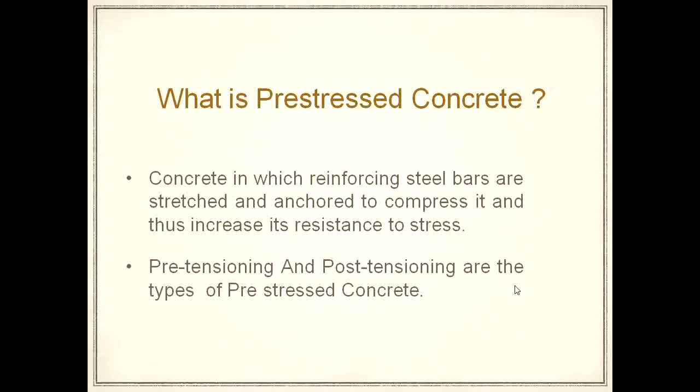So whenever we apply the load in a vertically downward direction, if it is a simply supported beam, it is going to bend like this. So when it bends, the topmost fibers are in compression and the bottommost fibers, fibers meaning concrete, the bottommost layer of concrete, are in tension.

So due to the compression and tension action, concrete can bear the compression but it won't be able to bear the tension. So on the top face there will not be any cracks in case of a simply supported beam, but in the bottom layer or bottommost fiber there will be some cracks like this.

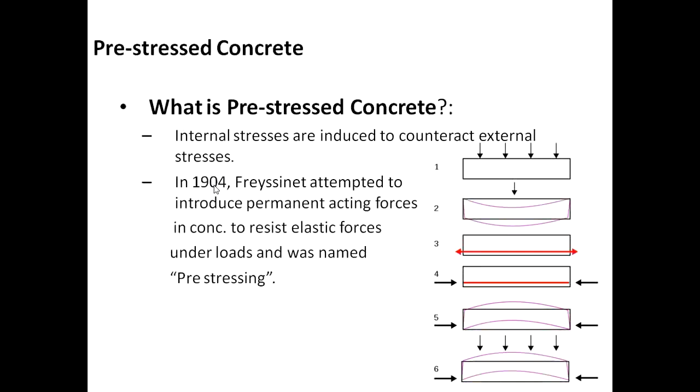So what is pre-stress? Internal stresses are induced to counteract external stresses. So in 1904, Freyssinet attempted to introduce permanent acting forces in concrete to resist the elastic forces under load, and it was named as pre-stressing. So in 1904, the arrival of pre-stressed force took place.

So you can see over here what is the main drawback of RCC, or reinforced concrete. We are going to study the main drawback of reinforced concrete first. Concrete is strong in compression, weak in tension. Steel is strong in tension, weak in compression. So reinforced concrete uses concrete to resist the compression and to hold bars in position, and uses steel to resist the tension. So in reinforced concrete, we use concrete to resist the compression and to hold the steel bars in position, and the steel is used to resist the tension.

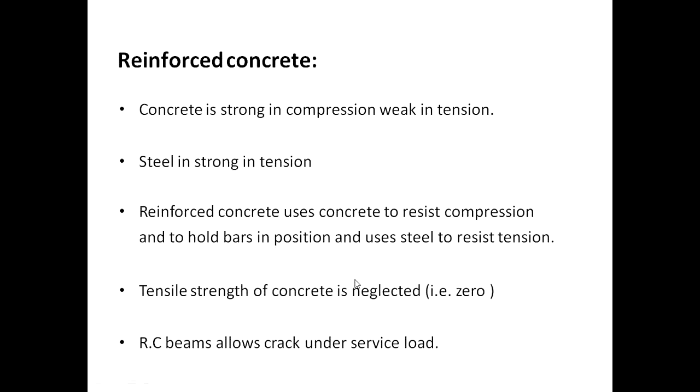So the tensile strength of concrete is neglected. Entirely, the tensile strength of concrete is neglected. So an RC beam allows cracks under service load. So that's what I have said. RC beams are allowed cracks under service load.

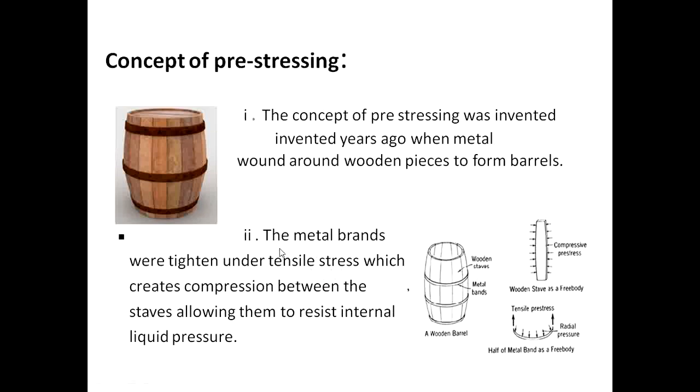Now, what is the principle of pre-stressing? Pre-stressing is a method in which compression force is applied to a reinforced concrete section. So how are we going to apply the compression force? We are going to apply the compression force by inducing tensile stresses. So the same wooden plank example I can take. Here compression forces are introduced by tightening the metal strips and inducing tensile stresses in them. Okay, so it is then possible to treat the concrete as elastic.

The effect of pre-stressing is to reduce the tensile stresses in the section to the point where tensile stresses are below the cracking stress. So actually the cracking is going to occur due to tensile stresses. As I have said, on the bottommost fiber there will be tensile stresses. Those tensile stresses are so high that they are more than the cracking stresses.

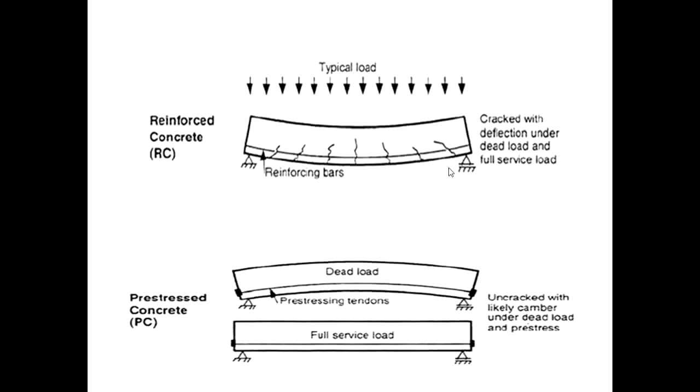So the basic principle of pre-stressing is the tensile stresses are reduced in such a manner that they should be below the cracking stresses. Thus concrete does not crack. This is the main advantage. It is then possible to treat the concrete as an elastic material. As the concrete is not cracking, it is suggested to treat the concrete as an elastic material.

The concrete can be visualized to have two compressive forces: internal pre-stressing forces, and second, external forces, dead load and live load. These two forces must counteract each other. So pre-stressed concrete is visualized to have two compressive forces. First, the internal pre-stressing force, which we are going to induce, and the external force. Simply I can say that the internal force should counteract the external force. So what is the internal force? The internal force is the pre-stressing force which we are going to induce.

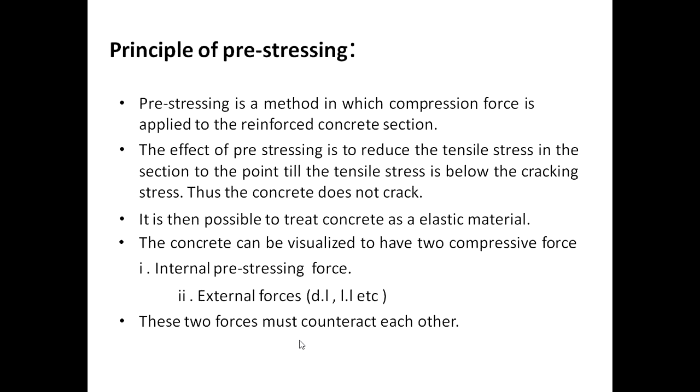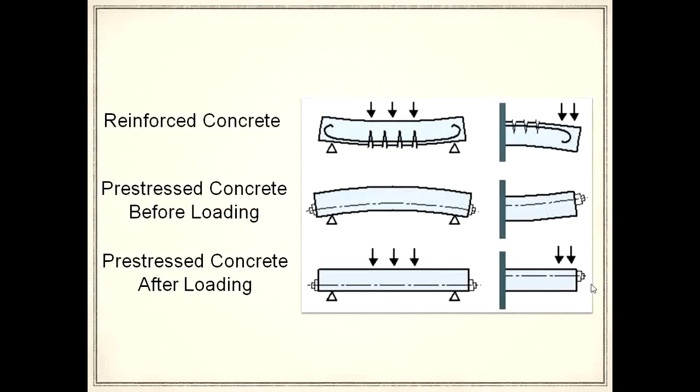Next you can see the principle of pre-stressing. We are going to go in depth later. So I will just continue with the introduction a little bit further. Okay, previously we were studying about this. So I hope you have understood the introduction clearly. Further you can see there are two types in pre-stressed concrete. In pre-stressed concrete, or in pre-stressing, there are two types.

One is pre-tensioning, another one is post-tensioning. So in pre-stressing there are two types, pre-tensioning and post-tensioning. These two differ in method of stressing. So in pre-stressed concrete we need to stress the steels. So steels are called as tendons. So we need to induce some stresses in the tendons. This inducing of the stresses is a very important parameter in pre-stressed concrete.

So in inducing the stresses there are two types, that is pre-tension and post-tension. So description of construction sequences will help to bring out the differences. So the construction sequence of pre-tensioning and post-tensioning differs. So that is the main difference between pre-tensioning and post-tensioning. Let us see in detail what is pre-tensioning pre-stressed concrete.

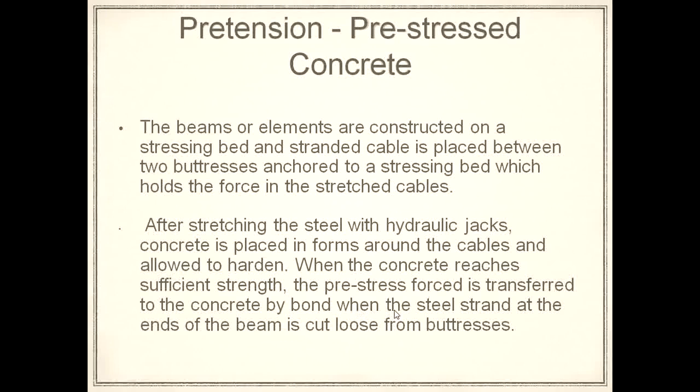So when the concrete reaches sufficient strength, the pre-stress force is transferred to the concrete by bond when the steel strands at the ends of the beam are cut. So you can see after the concrete achieves the desired strength, these tendons are going to be cut from here, due to which the stresses are going to transfer to the concrete using the medium of bond between concrete and steel.

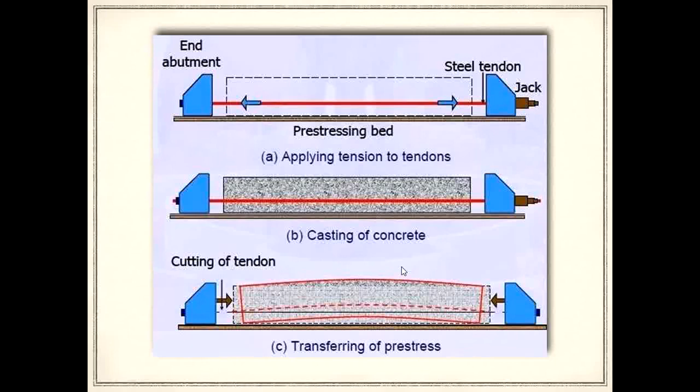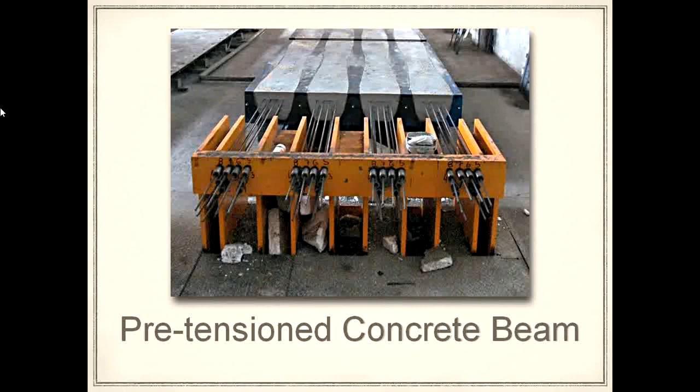So pre-stressing is very simple. Before pouring the concrete, we are going to induce the stress in the steel tendon or stress in the steel. So this is the real picture you can see. So these are the anchors, these are the tendons. So these are concrete beams which are placed. So you can see over here these concrete beams are induced with anchors, and before pouring the concrete only these anchors are tensioned. So this is a real life example for pre-tensioned concrete beam.

Similarly, what is post-tensioning? Post-tensioning is a technique for reinforcing concrete. So this is a technique for pre-stressed concrete. Steel cables inside plastic ducts or sleeves are positioned in a form before concrete is placed. So in sleeves, these steel cables are placed. Afterwards, once the concrete gains its strength, the cables are pulled. So here inducing the stresses in the cable is after pouring the concrete in the post-tensioned method. In the pre-tensioned method, inducing the stresses is before pouring the concrete. So remember, this is the main difference between pre-tensioning and post-tensioning.

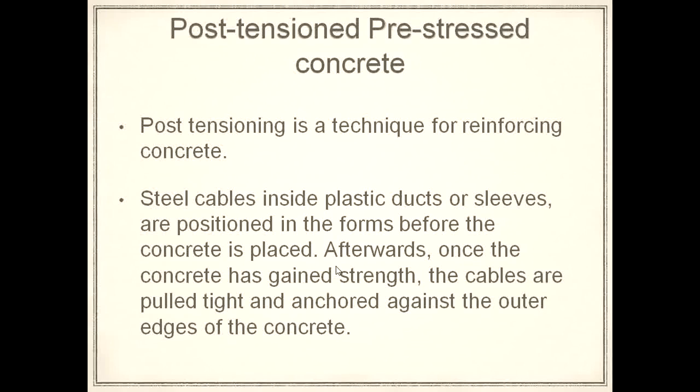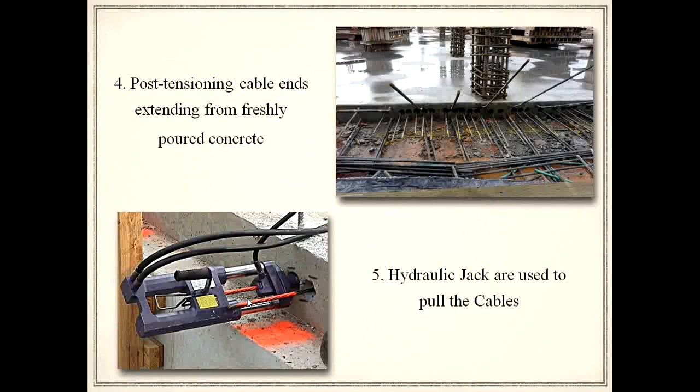So you can see whatever this greenish color, light green color is shown, these are nothing but sleeves. So in sleeves, these steel cables are placed. So we are going to place the cables like this, and we are going to tighten it. You can see over here. Okay. So these are the construction steps.

So pre-tensioned pre-stressed concrete is usually fabricated away from the job site in a pre-stressing plant. So pre-tensioning is done in the pre-stressing plant, whereas in post-tensioned pre-stressed concrete, application of stressing forces to the structure is done on site. This is also a very important difference. So in case of pre-tensioning, stresses are induced in the concrete in a plant or in some controlled condition, but not on the job site. But post-tensioning must be done on the job site.

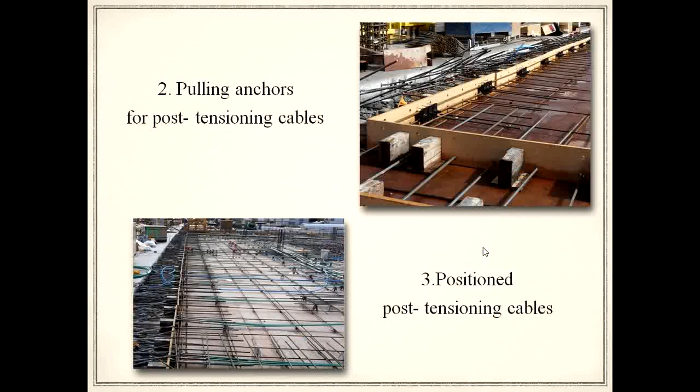Okay, so further, in the next session we are going to study the process of post-tensioning and the process of pre-tensioning. After that, we are going to study the different types of anchorages, different types of tensioning devices, etc. Further, after that, we are going to study advantages and disadvantages of pre-stressed concrete. So we will stop here today. After this, we will continue in the next session.